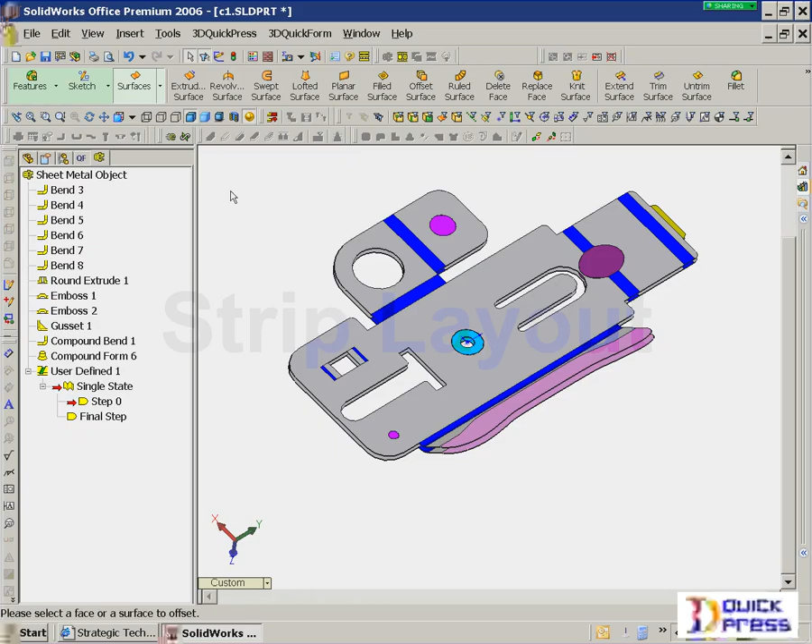To get the strip started, we're going to go to the strip button and create ourselves a strip with the one blank. We can do as many blanks as we like. Of course, in this case, we're going to do one, and I'm going to modify the strip parameters and very quickly show that we can lay out the direction, we can lay out the number of stations, and this is all a guesstimate. You don't have to know all this up front. You just got to get something started, right?

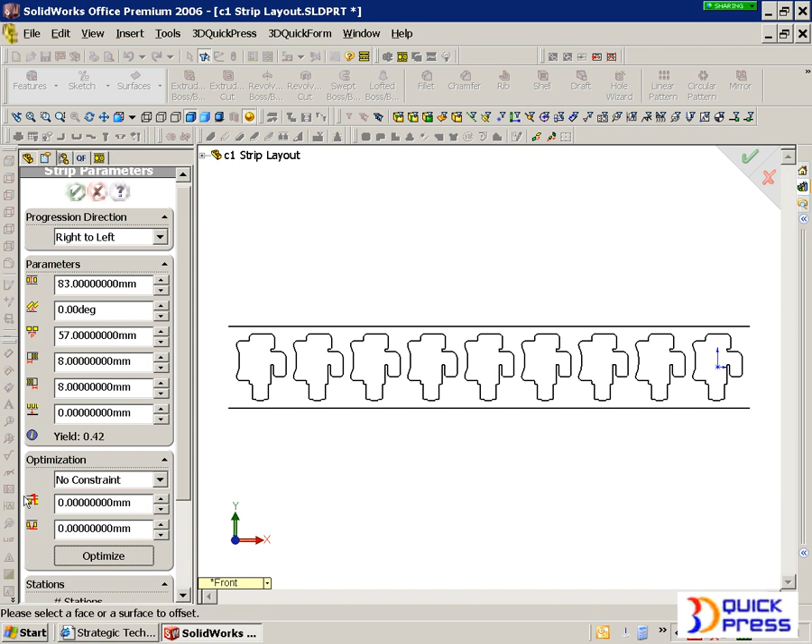So we're going to automatically create the piercings and the bends. We're going to do a little optimization. So we'll go down here and say, you know what? You can rotate the part as much as you want. I want to see what the best yield you can get. Right now it's 42%. And as you notice as I go through, it's actually nesting between stations. What's the best utilization? Now I gave it freedom. I gave it freedom to do as much movement as it had to.

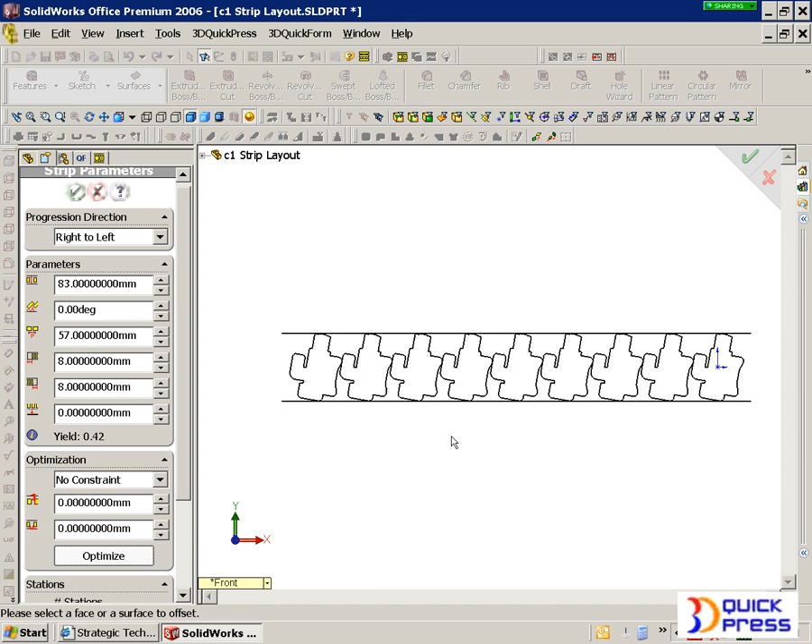We can also set it to not have any alignment with, let's say, the vertical orientation. So you have a lot of controls to quickly get you in the ballpark. But this would be our best case scenario, 67%. But let's go back to making it vertical. And let's say, okay, I want to constrain it, don't change the orientation. Now what's the best? I hit optimize again and it comes back with 60%.

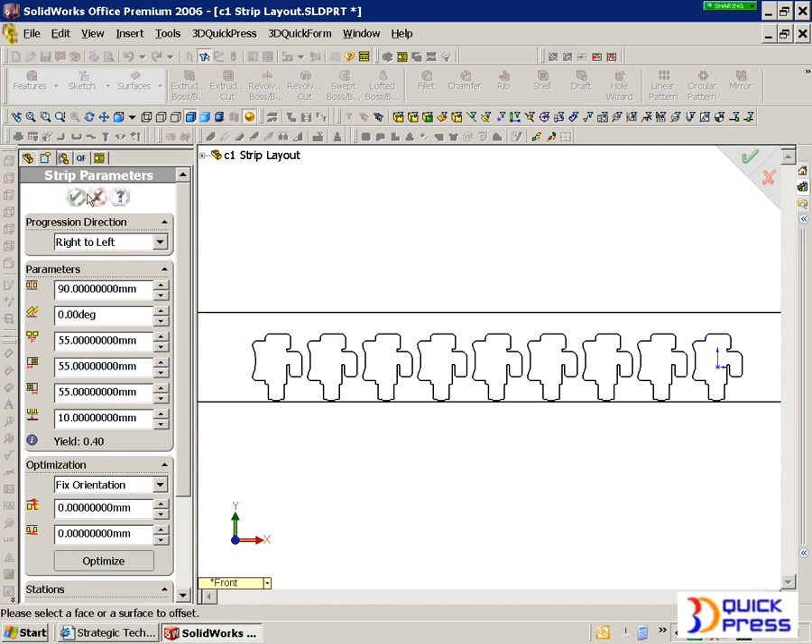So you can see the toolkit is very flexible, very easy to use, and you can always override what it comes back with. So I'm going to set up some margins, the progression. I'm going to even offset the direction of the part in the strip. And then let's let it create it. This is where we take over and let you do the process layout, and we do all the modeling. Okay? The most you need to know how to do in this case is 2D, which we hope you can do.

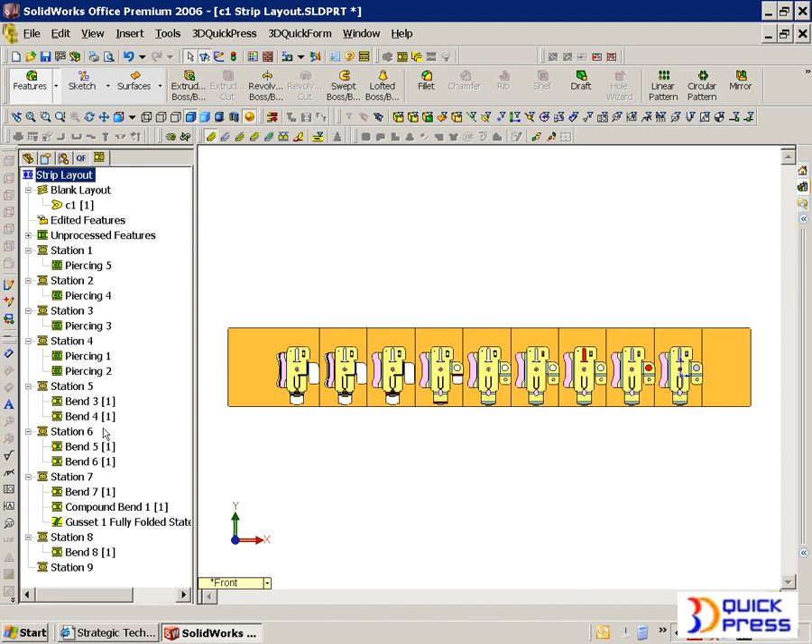On the left here, you notice we have a strip manager. This lays out the process. I asked for 9 stations. It distributed what it could think of and what it could create automatically amongst those stations. The forming operations are up to me. So I'm going to take these forms that I created, which were those simple embossments, round extrude, and that flange. I'm just going to get it started by dragging it into station 5. And boom, you can see very quickly that we have those active in station 5.

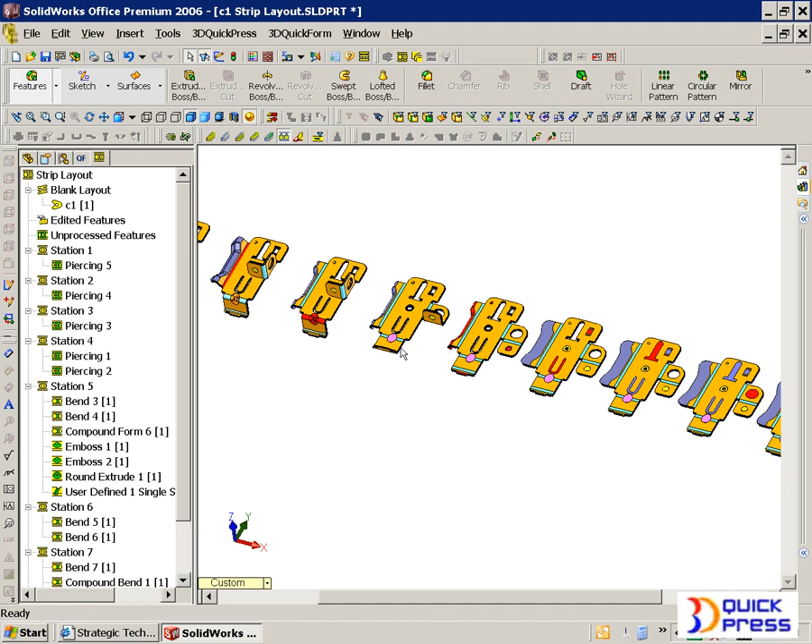Also, I can turn off the stock at any time. So this allows me to not have to do notching before forming or bending. This is all very powerful. In a traditional environment of creating a strip, you will typically have to notch before you can do any process layout, which would be very time consuming, as you would assume.

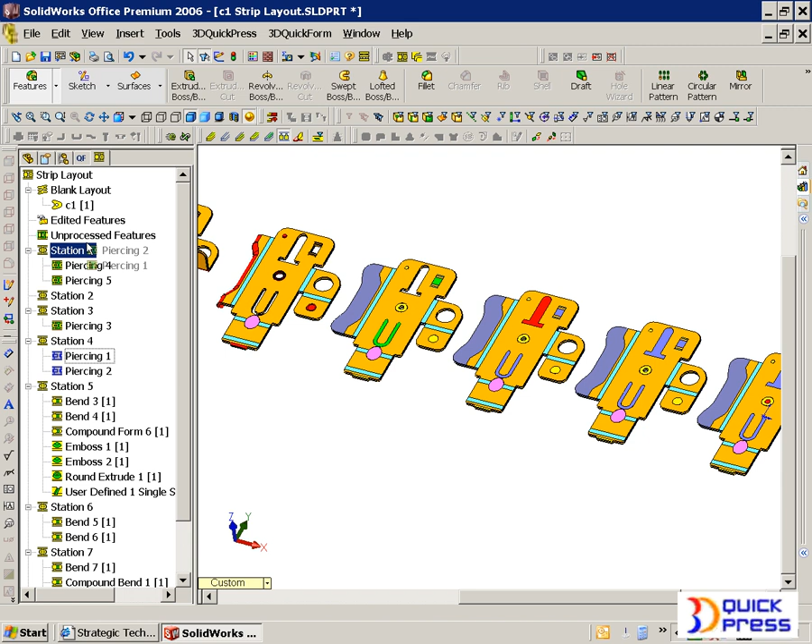Let's rearrange the process a little bit more. Let's see that on station 1 there's a piercing 5, and station 2 there's a piercing 4. Let's take piercing 4 and put it into station 1. Boom, instant feedback. So you can see that the system is revolutionary in its speed. If you're not familiar with 3D, you'll find that out as soon as you try to do it manually with the out-of-box 3D CAD.

Alright, so I'm just kind of going through here. It's not really pertinent that I know the process exactly at this point, because as you get into the design more, you're going to make changes. But I want to realign a few things here. For instance, this form that's happening in station 5, I want to put it over here. I want to simply activate here by clicking on it. You notice station 5 goes to blank.

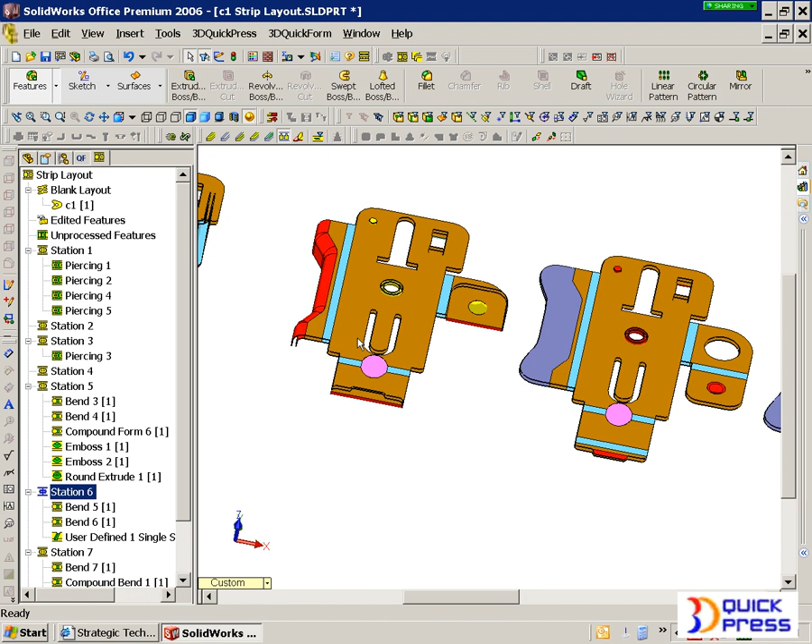Let's take this bend and activate it. But not just the full bend. I want to take that bend and split it up. As we mentioned earlier, we can just take that bend and say create split bend, tell it how many divisions you want and what angle each division should be, pick OK, and you'll see that we have 3 bends now that we can inactivate any one of them and rearrange the process.

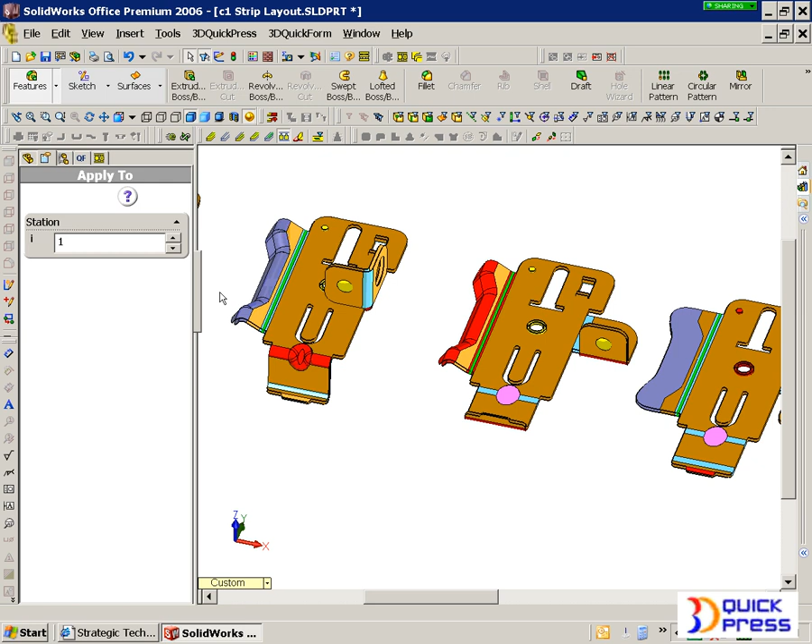Now, when you inactivate something, it doesn't delete it. It's part of the overall list here, but it's in unprocessed. So you can temporarily put it on hold, and then once you're comfortable, you can apply it anywhere. But you won't lose track of specific processes.

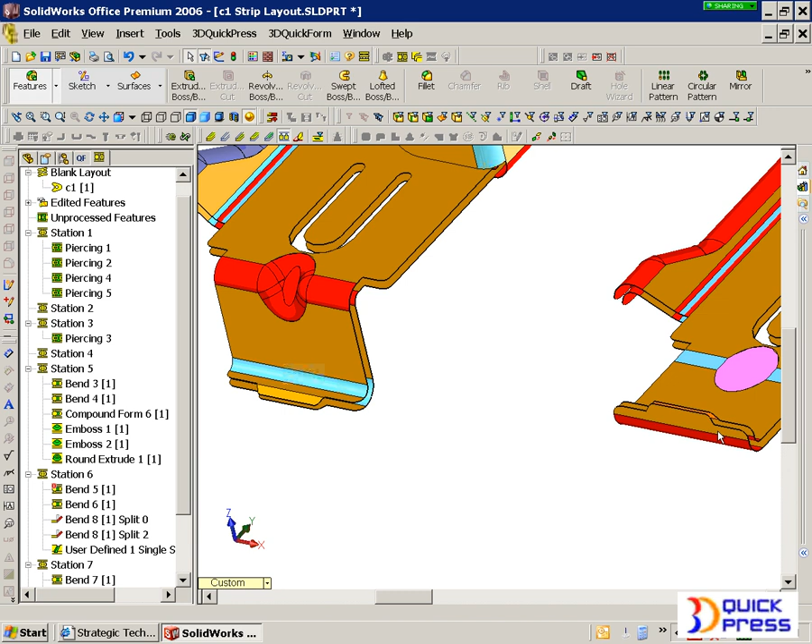Same thing goes for springback. You can add springback at any time you want just by clicking on the bend and telling it how much springback. What I'm going to do is put about 10 degrees, watch the bend. The bend will update in this station, but the next station it goes back. So we had a 90-degree bend, and of course it goes to 100, and then it goes back to 90 in the subsequent stations.

Alright, what about visualization? I've already kind of showed you. You can turn on and off the stock, you can show the lower material, you can show the upper material. You don't have to look at it as one chunk of material. It's an intelligent strip.

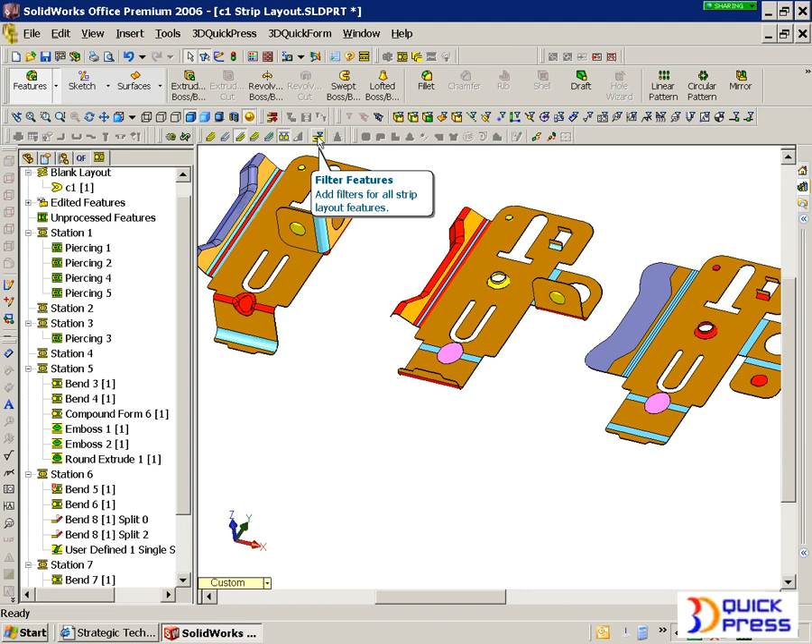The other thing you can do is let's turn off the stock and let's put on superimpose here. Superimpose will allow me to go in and turn that off for a second. Oops, pilot error. Superimpose. There we go. So we can see the before and after of what's happening in that station. And yes, no matter what you rearrange, it will update. So you can run interference detection with that. You can do a number of things. It's not just a visual tool.

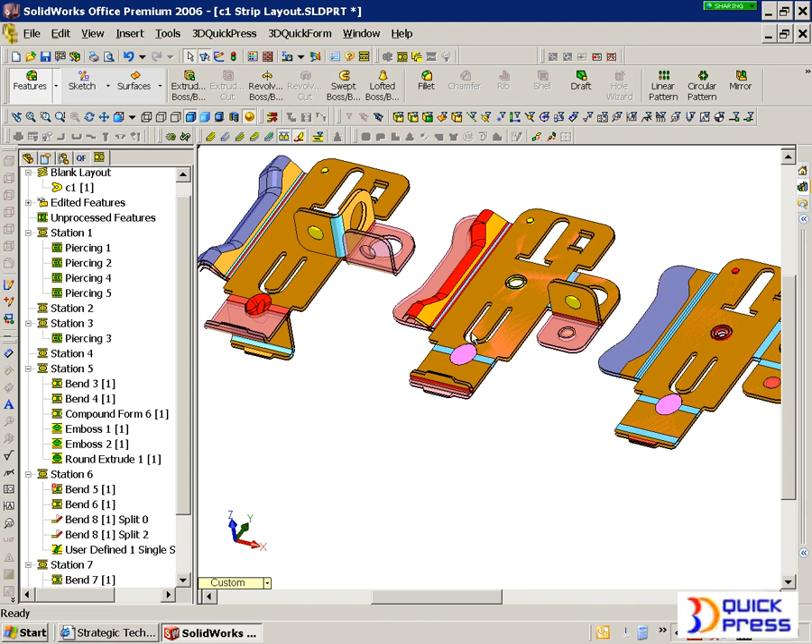Alright, let's go back to the full strip and start some notching. To get notching started, it's a 2D process, so you're put into the SolidWorks sketch environment. You have two reference stations. You have all the standard tools that you're familiar with: lines, arcs, circles, points, trimming tools.

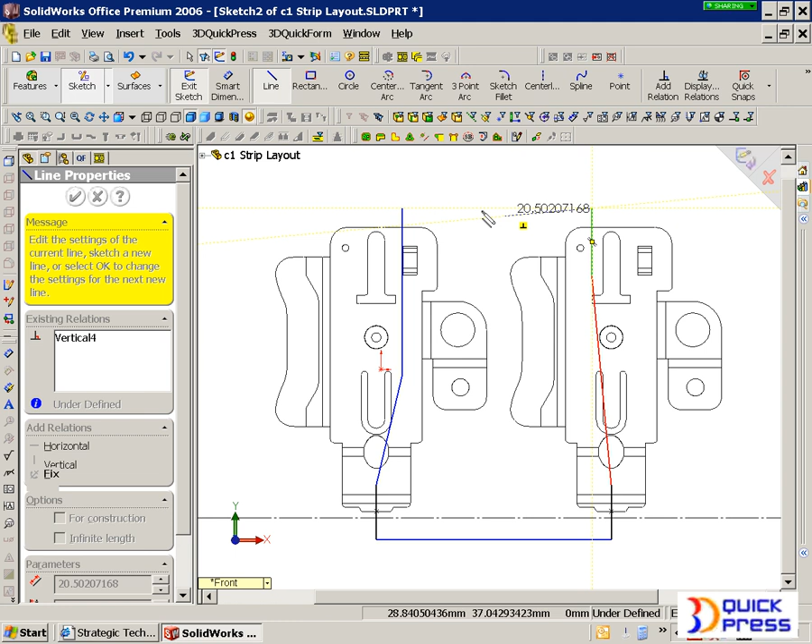And what we're going to do is do some very primitive snapping here, and I'm going to lay out a basic idea of what my notch should take, what material I want to remove. And we do this with just kind of eyeballing where we want to get started. And then we can add dimensions and continue the process. Of course, we've added tools to this environment to make it even easier.

So here you see that I've encompassed an area, more or less a polyline. And what I'm going to do is just click on this QuickPress tool called Quick Sketch. Quick Sketch will automatically go through and evaluate which edges are the external edges. I can make sure that I have a very clean profile.

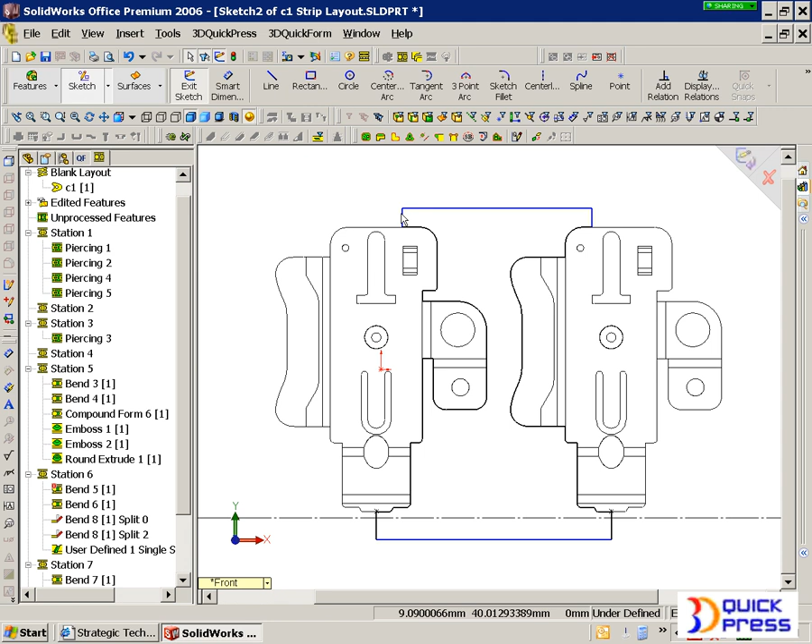Let's put some corner treatments on here while I'm right up here. Corner treatments is another sketch utility. As you can see on the left here, we have the circular, rectangular, all round. These favorites can be saved. So you have different styles, but all you have to do is click on it on that edge, and it will automatically create that geometry very quickly.

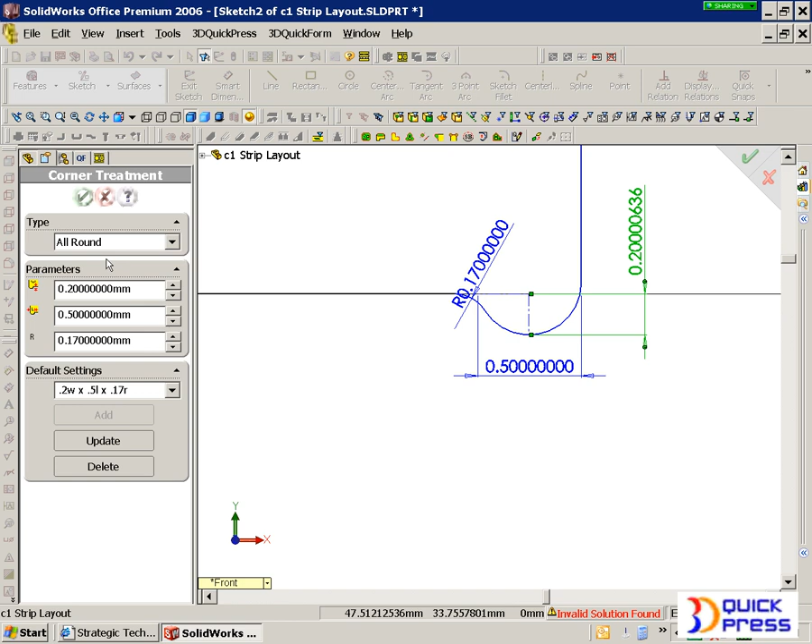It will automatically dimension that geometry, and it will support obviously multiple configurations. So if it's a spline to a spline, for instance, it will still do it. We do support all geometry configurations.

Alright, so now we have our first notch. Let's apply it to the strip. And notice what happens when you create your notches. You can take that information and just apply it in a specific station, and it will automatically remove that geometry down the line. Now we can take notches and create them in batch mode.

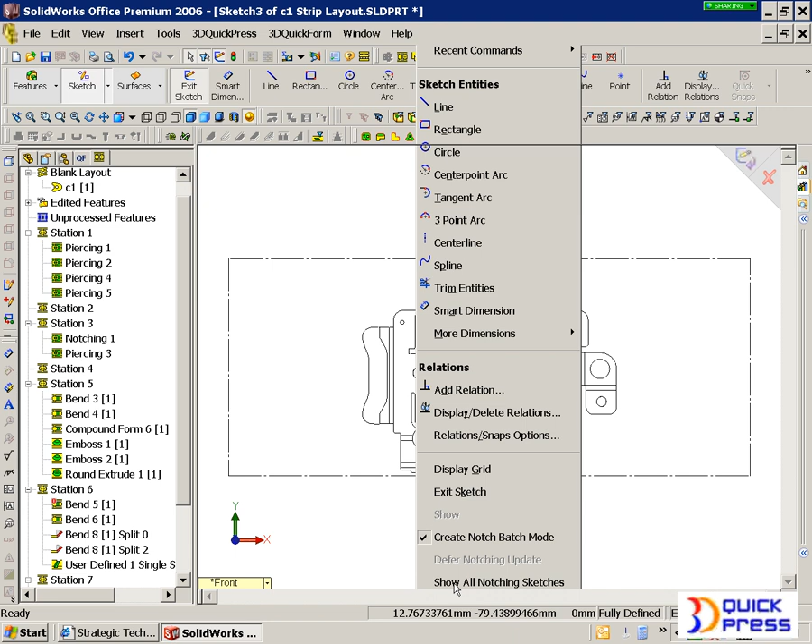Let's do that. For instance, I might want to go in here and create a series of notches in a row without jumping in and jumping out. And I want to see my previous notches to reference to. So on the top here, we're just going to kind of put a cutoff punch here, and of course I can dimension between those punches even though they're going to be in different stations. I'm going to click on my Quick Sketch tool. It evaluates what needs to be created and what needs to be trimmed.

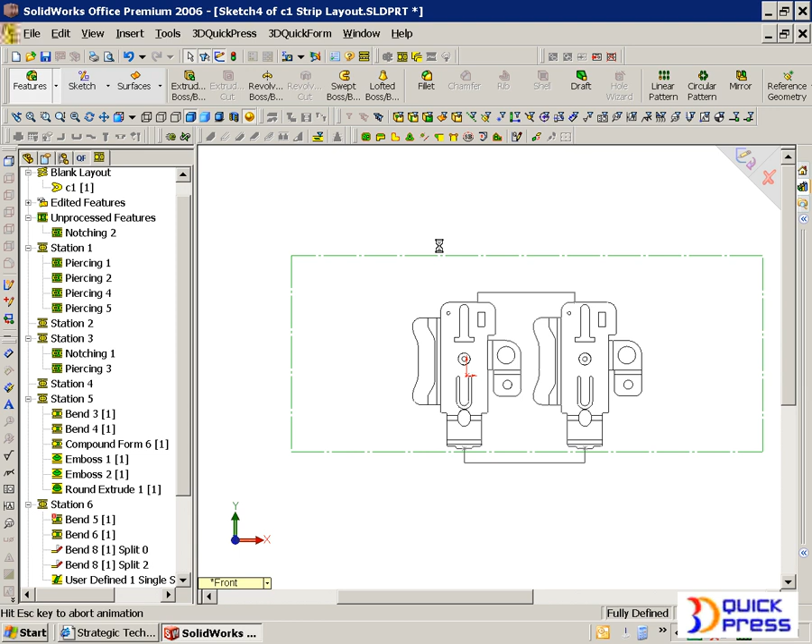I can add my corner treatments or just go to the next notch and come back and edit that later. So in this case, what I want to do is just put a pilot in there. I'm skipping dimensioning, but be aware that you can do any type of dimensioning you want. I just want to quickly get some ideas on the screen. So that's all it is for notching, and it's very quick, very simple.

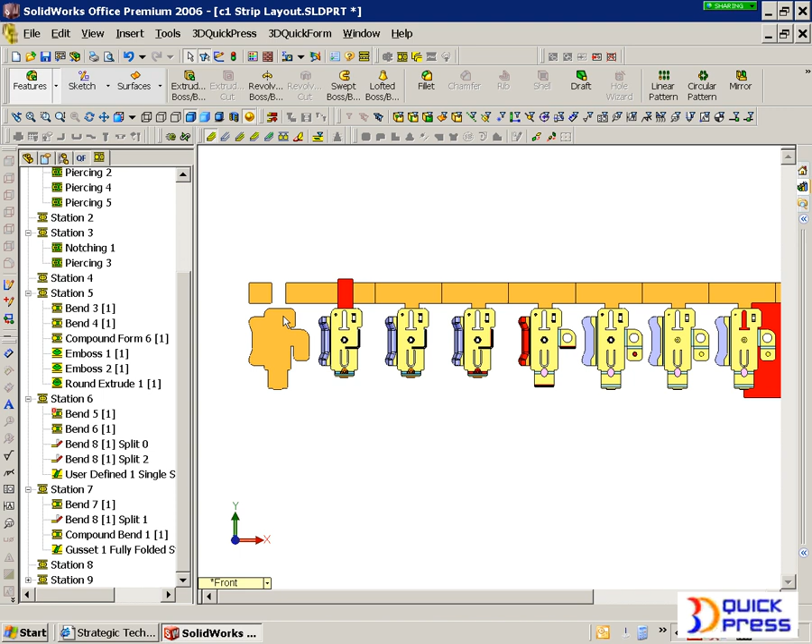What we're going to do is turn off all the 2D references and start applying it to the strip. Notice the stock margin at the end here shows that I have not clearly defined my notching all the way around the part. So that's another indicator or helper. We're going to apply this one to this station. Watch what happens with the margin material. It automatically kind of checks and shows you that you have proper 2D clearance.

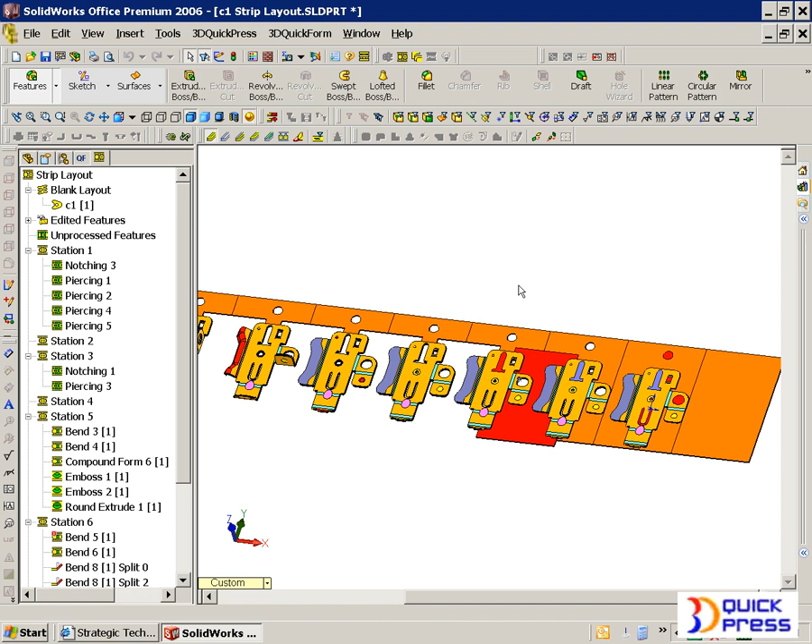Now, the other notch would be for our pilot. So let's just grab that and drag that into station 1. And you can see it automatically takes care of all the CAD geometry. Now, if we want to present this to our client, we can do so at any time. First of all, you may want to work with them on the forces. Center of force indicator is available right here on the screen.

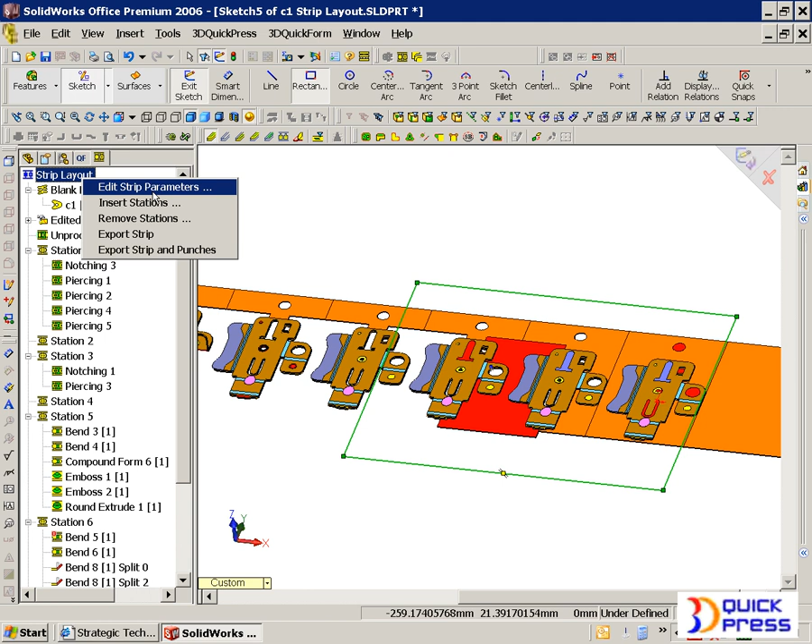Also, we have a series of other tools that you can go in and study the forces for a specific region. So real quickly, I'll just lay out a quick sketch of a rectangle emulating maybe some type of stripper area or whatever it might be. And I'm going to take that and do my strip forces. And let's make sure that we have one region. There we go. And we'll create our feature force vectors for just this area.

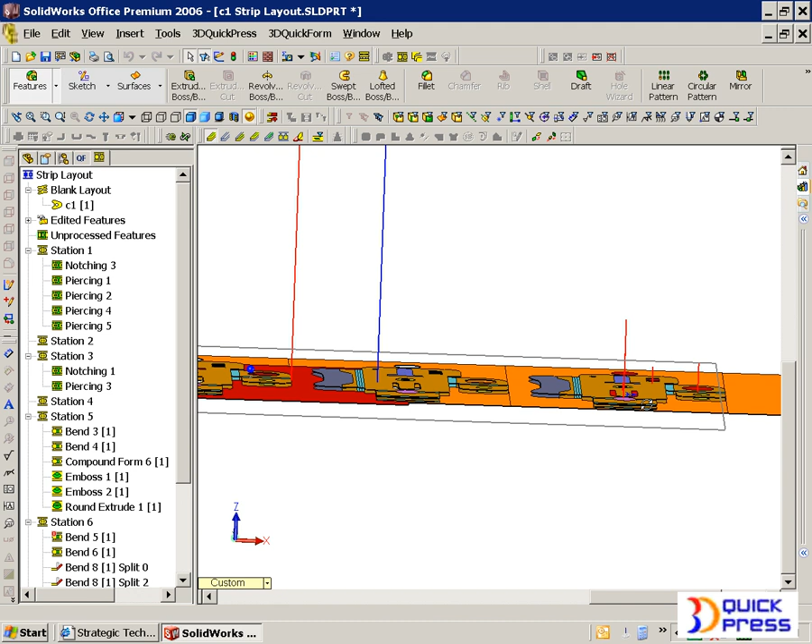You put the shear strength in, yield strength, and you get your cutting, bending, and resultant center of force and the total magnitude of that area. So you have 3D sketches. They're a series of vectors. You see them on the screen. They're red. If you edit those, you can put user defined in. You can tweak the numbers and of course do additional calculations. So I'm just going to go in here and just edit this sketch.

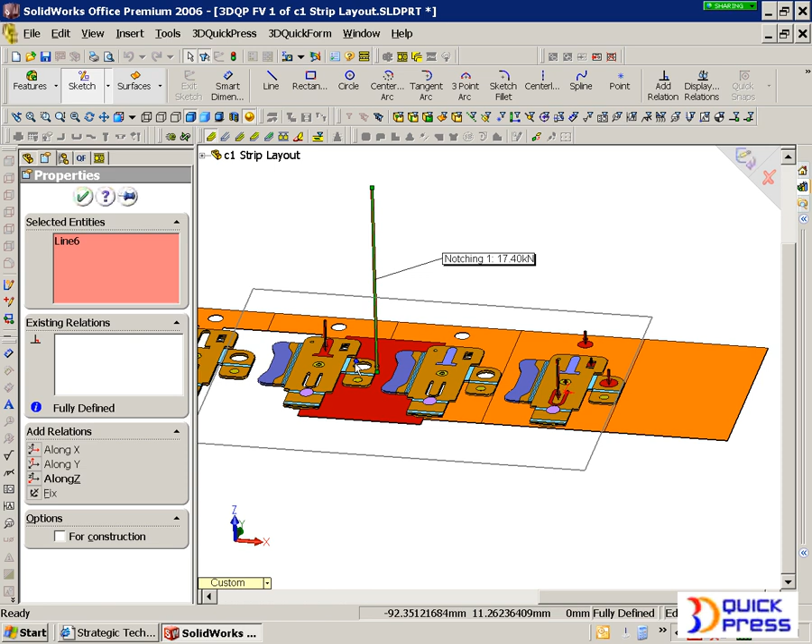And when we edit the sketch and I click on one of these guys, you'll notice that the specific load for that specific notch or that pierce or whatever it might be, it could be a bend, it's going to give you that specific force. Okay. And then finally, the resultant force, the blue vector, is the summary of all those vectors, plus it's at the center of force for that area. So it'll be quite useful and quite quick. You don't have to study and do it all manually.

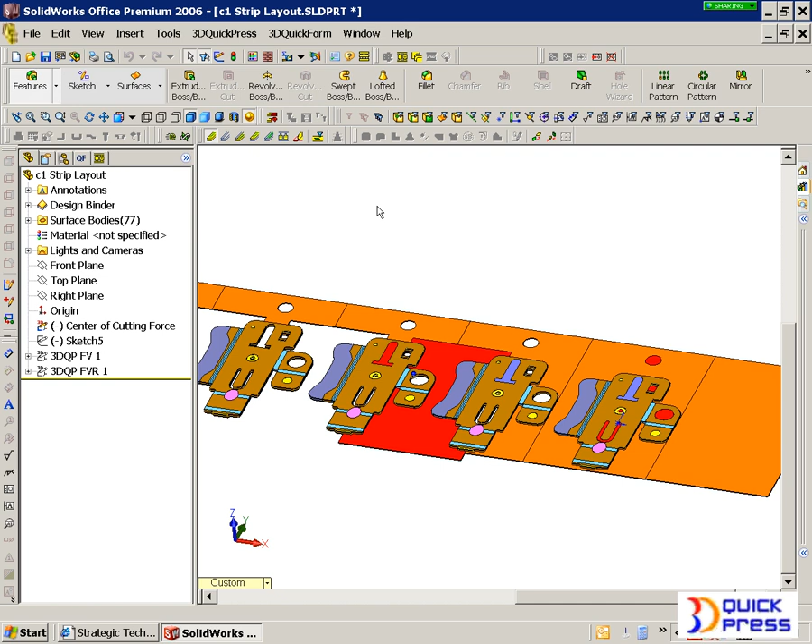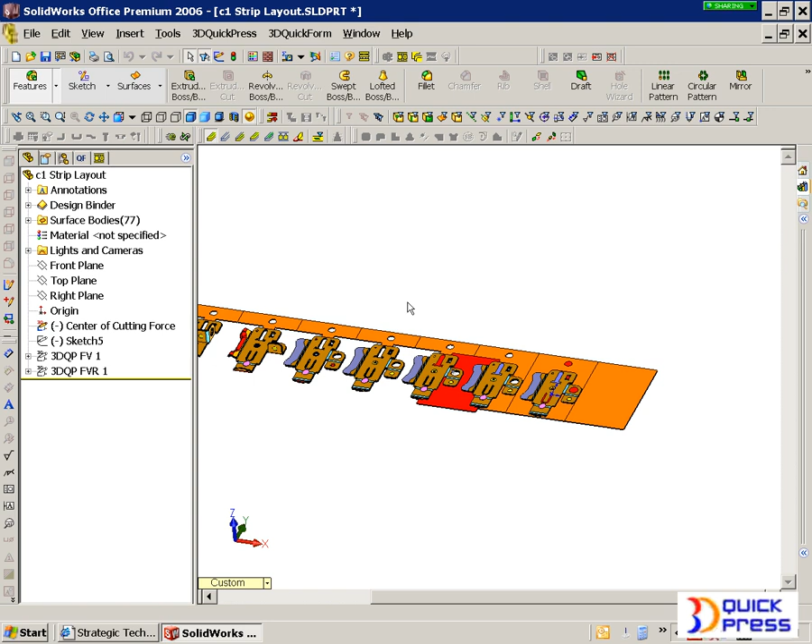Alright, so let's hide this information. Let's move on to our presentation to our client. Well, we can do a number of things. We can output this to DWG at any time, bring it into AutoCAD, and do maybe what you do today. However, today there are alternatives for communicating other than DWG, because DWG requires somebody else to have a CAD system. Like they may have to have a viewer, they may have to have AutoCAD. Well, what if you don't want to bother them with that, and you want to kind of knock their socks off with some other technology?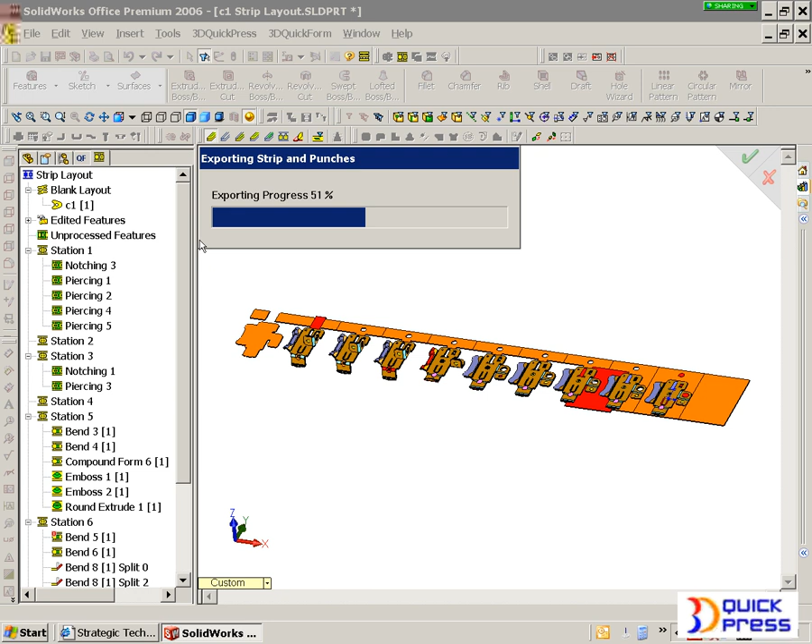We have a technology in SolidWorks called eDrawings. It's kind of like PDF for engineering, except it's easier. What it will do for you is it will automatically create the actual data in 2D, 3D, it doesn't matter, and it will automatically package the viewer with it if you choose. So the user that's getting it does not have to worry about downloading anything. Even with Adobe PDF, you have to download it, and you have to know how to do all that, and a lot of us don't have the time to do it.

So let's go through here and show you what an eDrawing is. With one click of the button, I can quickly get this into a format that I can send to a client via email.

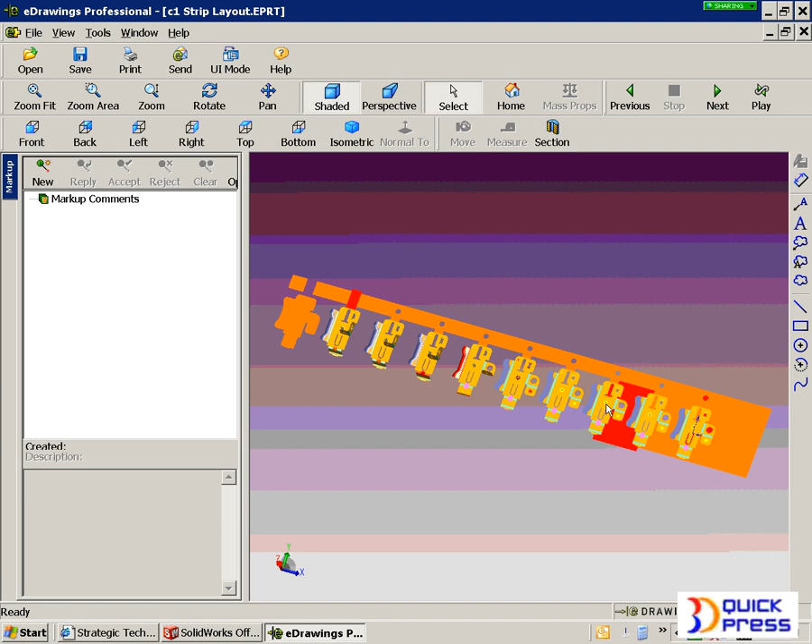This file, by the way, the eDrawing of the strip, is about 40 to 50 kilobytes, which is tiny. Okay. Now they can take this and they can section it, they can move it around, they can rotate it, they can play an animation. It's all built in. And they can document it.

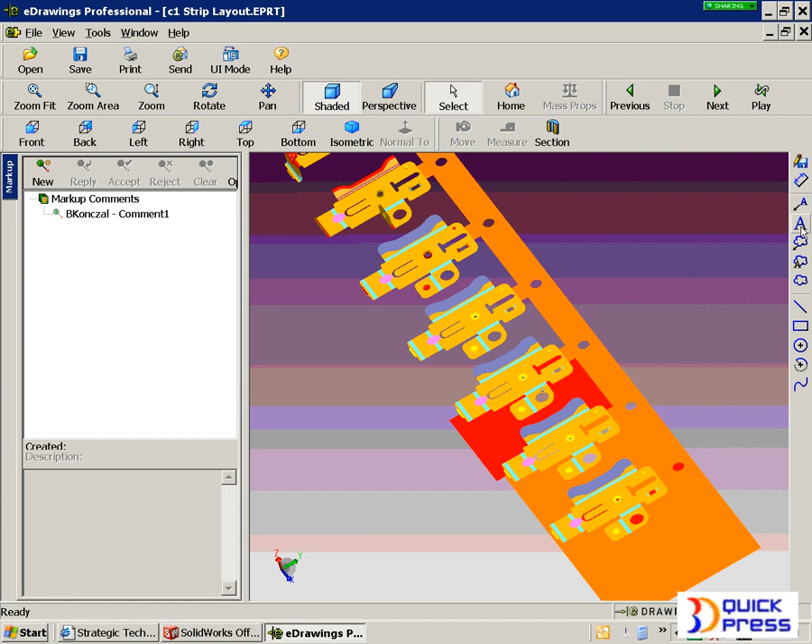So you can say, hey, you know what, for this station here, you may want to split up this. So they're giving you feedback, and it's written, and it's capturing their name on the left. So say, split this punch. Okay, great. Now they rotate it around again, and they decide they have some other feedback. Say they want to remove this station.

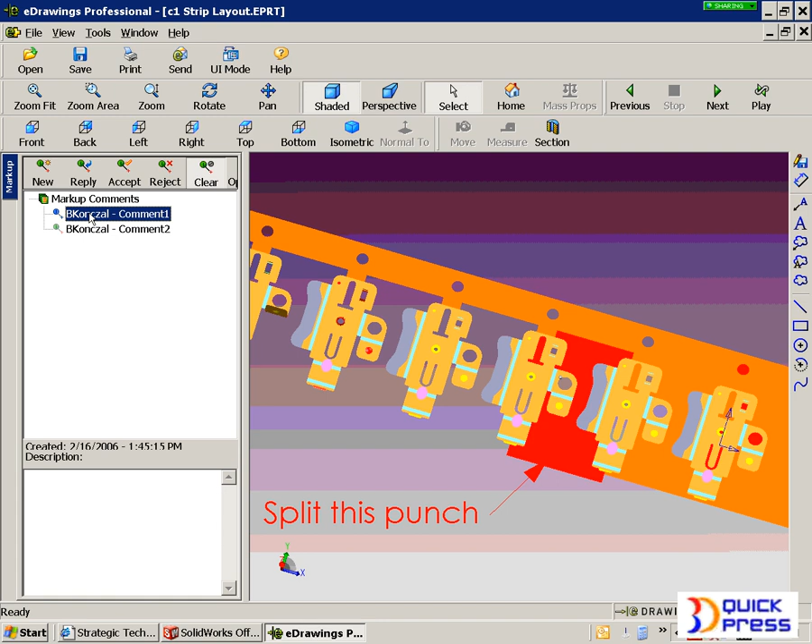So you can see that you're going to end up with a lot of different notes. So when you get it back and it's in some other view, how do you know what they were looking at? So you click on the comment on the left, and it changes the zoom scale and the orientation, exactly what your client was looking at. And it's all captured. They hit send, zips it up, attaches the eDrawing back to you. You have it. You can continue to accept, reject, reply, and continue your digital conversation.

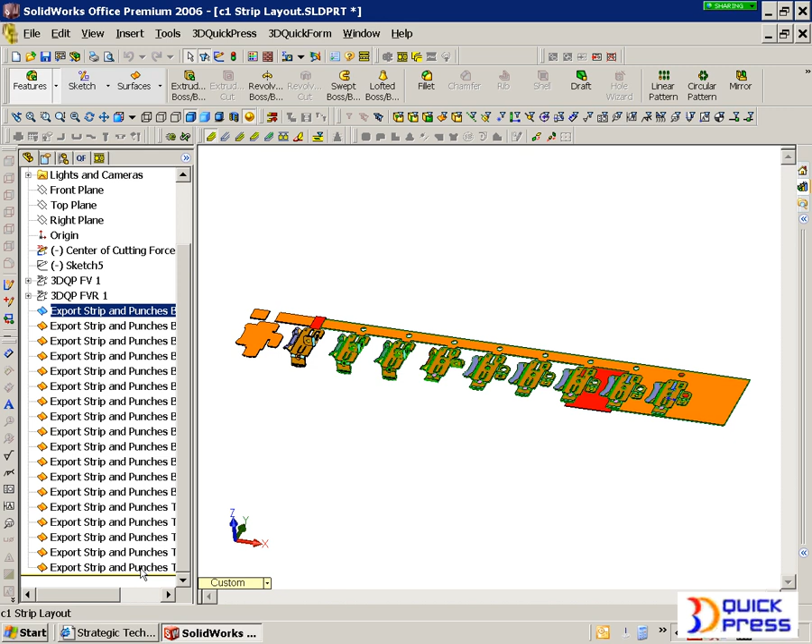Now that we have some feedback from the client, let's take that information and let's get rid of some of the temporary information here. And let's make those changes. First of all, let's split up that process. Okay, not a problem. Let's just delete and redo, right? No, you don't have to do that. That's old technology. What you do is you edit the actual sketch, or you split the punch. And the split punch is very easy to do because all you have to do is tell it where to split. It takes care of all the trimming and all the offsets and so on.

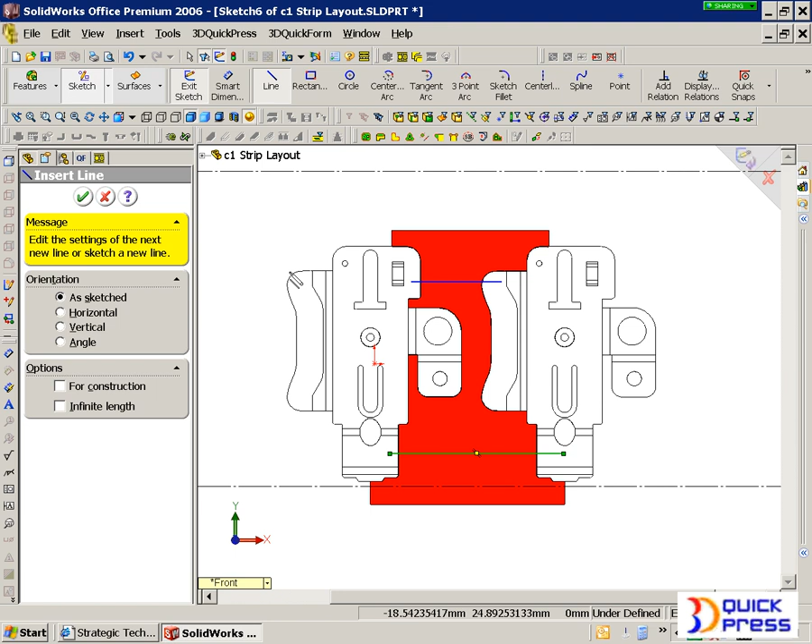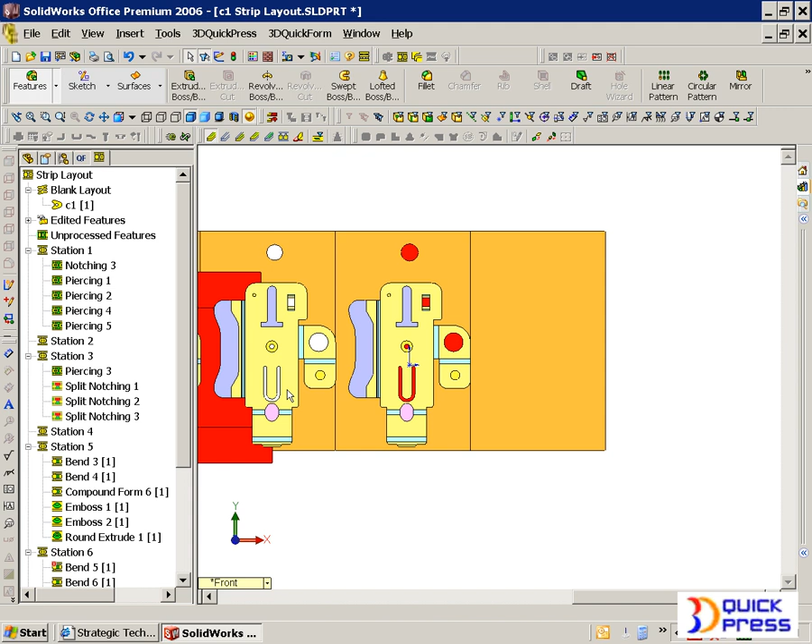In this case, it knows it's a split punch, so that means it's going to offer you the ability to add undercut or extend one punch underneath the other. We could put in any edge extension, of course, corner treatments at this point. Now it's going to take that one process, divide it into 3 processes, and then you can rearrange them anywhere you see fit. You can even disable them. You don't have to use them if it's not something that's appropriate. So I'm just going to move these around to give you a feel for how difficult that is. As you can see, it's pretty simple.

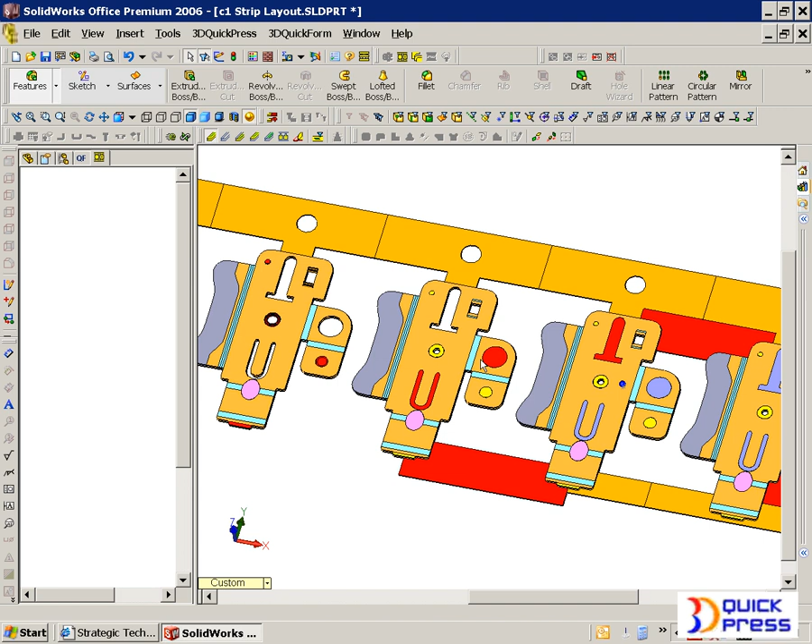And over here we have station 4. Well, we got an issue with station 4, right? I'm going to take these piercings and drop them into station 4 to make my point apparent. We have 2 processes on the inside of station 4 and one on the outside of station 4. If you use any other solid modeling or surface modeling technique and you delete that station, you're going to delete those processes, which doesn't make sense. In our system, you don't.

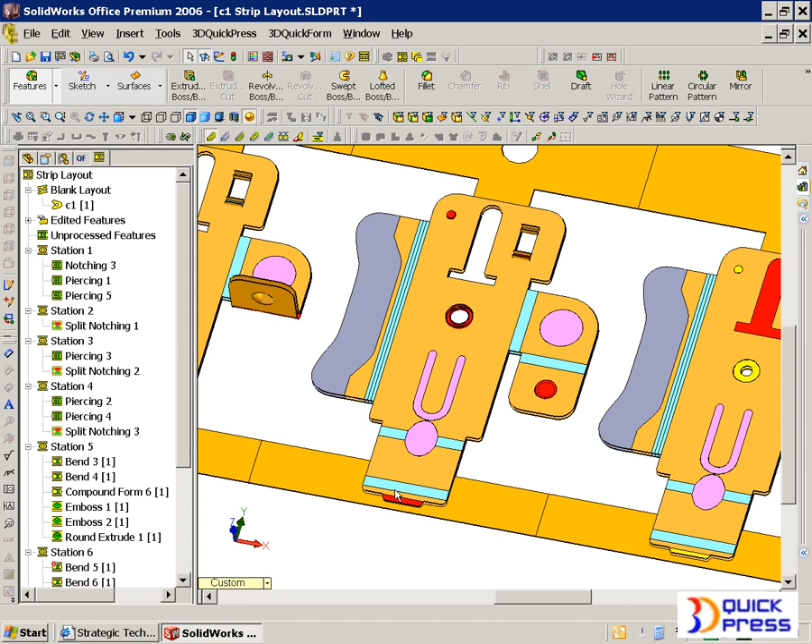So let's just go in here and remove some stations. You see, first of all, it's very quick to do. You just pick it on the station, and even though it's inside of the other stations, it's automatically going to take care of itself. Now you'll notice that we have ourselves kind of a different strip because those processes were disabled, but they weren't deleted. So what we do is we go back here, we see that they're in the unprocessed list, we drag them around to where we see fit. Now that station 4 is no longer active, of course we have a new one, which is formerly station 5.

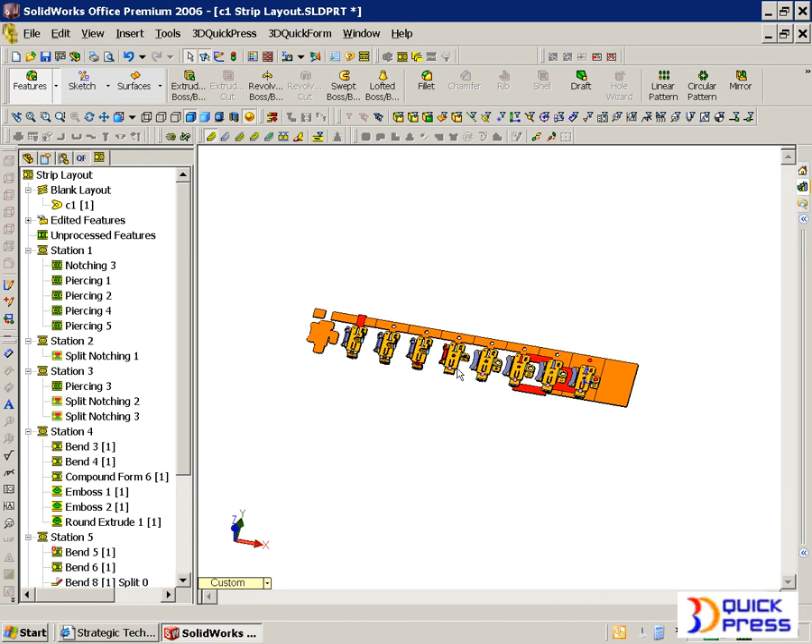Alright, of course all this information is being tracked in the system. As we spoke of during our earlier presentation, you'll see that underneath custom properties of the part, you have all this documented information, including the calculation of your total cutting length for your piercings and notchings. I'm sure that will save you some time, right? Take that information and use it for a number of different calculations. And if the strip changes, that will change too, so you don't have to do your recalculations manually.